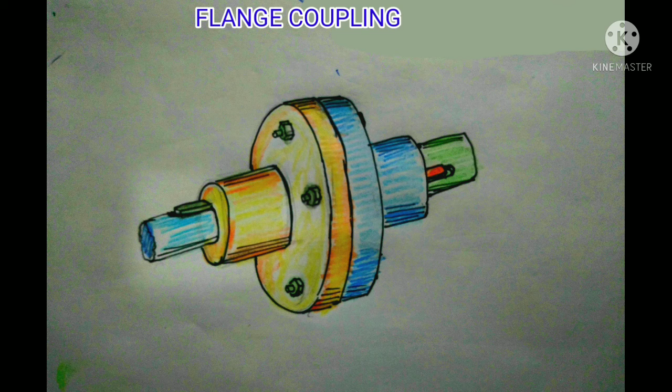Welcome everyone. Today in this video I am going to discuss the design of flange coupling. This is the drawing of a flange coupling. First I will discuss about the flange coupling, and then I will discuss how to design it.

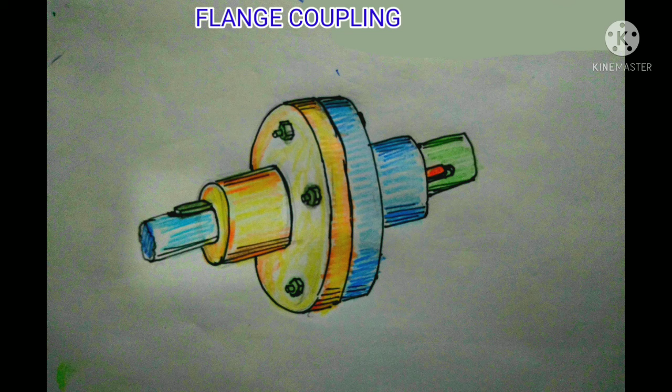Here we will take a look at different parts of the flange coupling. This one is the driving shaft, from where we transmit power to another shaft, called the driven shaft. Both shafts are coaxial, so we can transmit power from the driving shaft to the driven shaft.

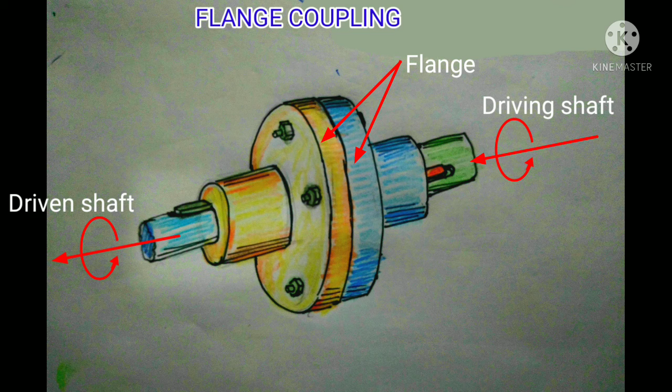These are the two flanges, driver flange and driven flange, and this portion of the flange is called the hub. There are keys. A key is placed between the hub and shaft for tightening and to prevent slip between shaft and flange. There are also nuts and bolts to hold these two flanges together.

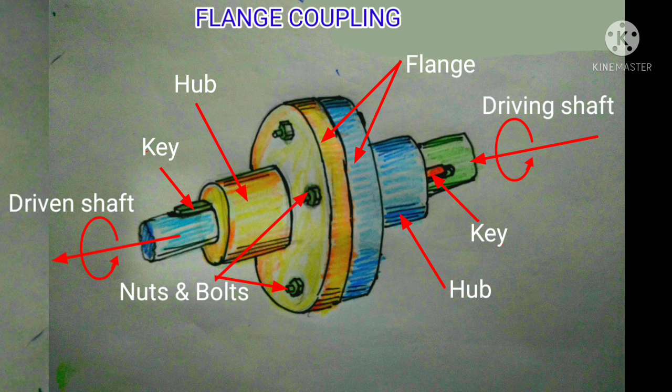Now we will take a look at the flange coupling in the disassembled condition. Here we see two flanges: one flange is for the spigot side and another one is for the socket side.

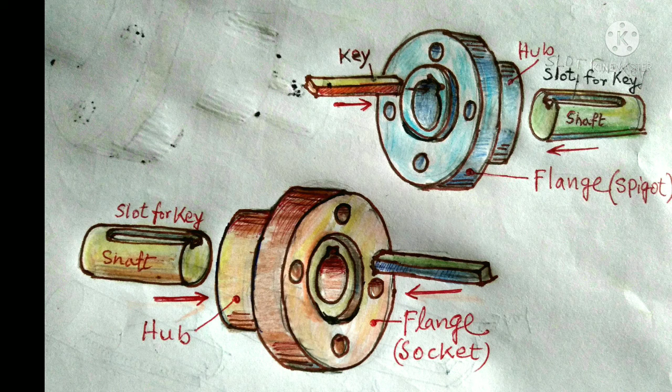It will be better if we compare it with the cross-sectional view. So this is the full sectional front view of this flange coupling, this is the flange for the spigot side, and this one is the flange for the socket side.

Look at this portion of the hub. There is a socket, so that the other part of the hub from the spigot flange can be inserted into this socket portion of the hub.

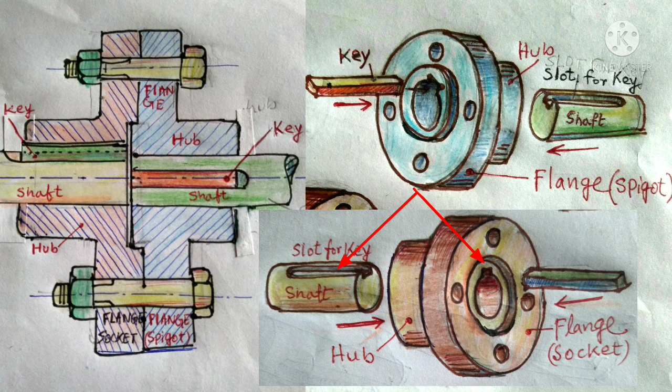Look at the shaft and hub. There is a cut slot between the shaft and hub to insert the key. Half portion of the key is inserted in the shaft and another half part is inserted into the hub, so that the key is used here to prevent slip between the hub and shaft when the shaft is rotated.

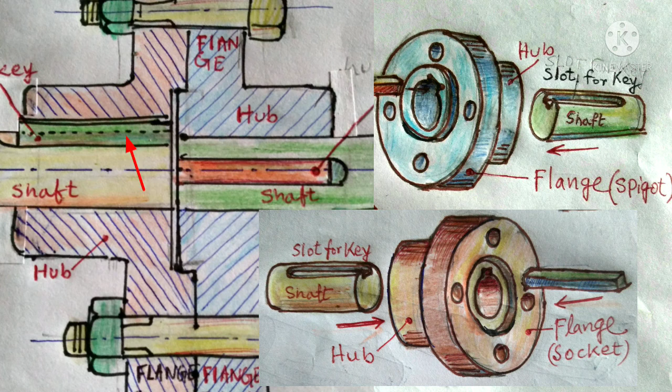There is another important thing, which is the material. Here the shaft is made of steel and the flange is made of cast iron, and keys and nut bolts are made of mild steel.

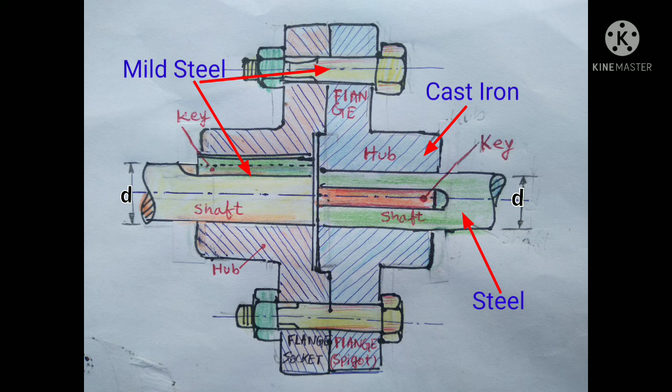Now we will go to the design part. We will discuss the design through a problem.

The problem is: design a cast iron protective type flange coupling to transmit 15 kilowatt at 900 rpm from an electric motor to a compressor. The service factor may be assumed as 1.35, and the following permissible stresses may be used.

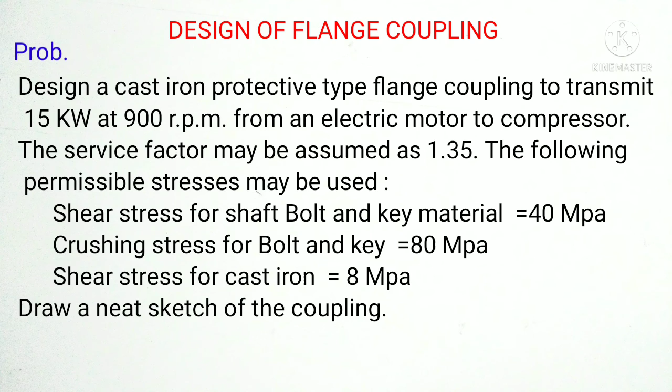Shear stress for shaft, bolt and key material is 40 MPa. Crushing stress for bolt and key is 80 MPa, and shear stress for cast iron is 8 MPa. Then draw a neat sketch of the coupling.

Now we will take a look at which data is given. First is P, that means power, 15 kilowatt, that is 15 into 1000 watt. Next is N, that means rpm, the rotation of shaft per minute, revolution per minute, which is 900. Next, service factor is 1.35, and next one is the shear stress.

Tau s is for shaft, tau b is for bolt shear stress, and tau k is for key, which are all equal, and the value of tau is 40 MPa, that means 40 Newton per millimeter square. And the crushing stress, which is sigma c: sigma cb for bolt and sigma ck for key, which are equal in value, and the value is 80 MPa, that means 80 Newton per millimeter square.

Next one is shear stress for cast iron. We know that the flange material is cast iron, so tau c is 8 MPa, that means 8 Newton per millimeter square.

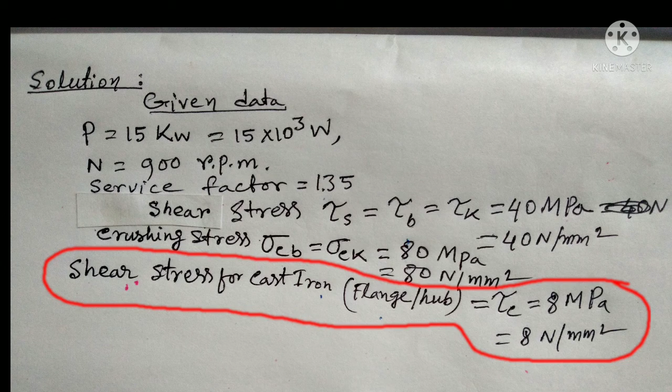Before starting any design, we have to know the relation between power and torque. So let's start. First one is the angular velocity, denoted by omega, and we know that omega is theta by t, where theta is in radians and t is in seconds.

Here n is the number of revolutions per second. As we know, for one revolution the angle rotated will be 360 degrees, that means 2 pi radians. And for n revolutions, it will be 2 pi n radians.

As n is revolution per minute, for 1 minute or 60 seconds, the angle rotated is equal to 2 pi n radians. For 1 second, the angle rotated will be 2 pi n by 60, the unit being radians per second. As we know omega is in radians per second, omega will be 2 pi n by 60.

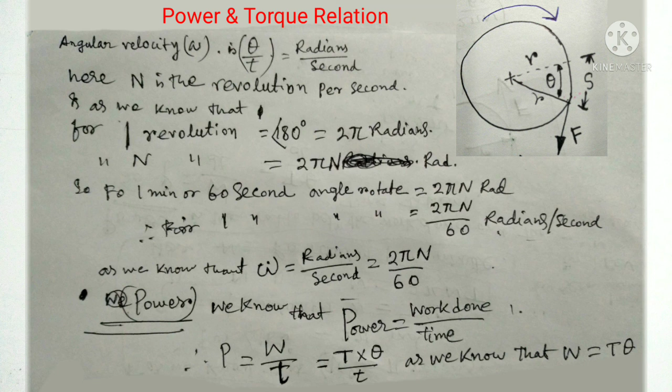Now look at this picture. Suppose this is the cross section of a shaft whose radius is r, and suppose it is rotated in the clockwise direction. Here F is the circumferential force and S is the distance moved by the force F, where theta is the angle in radians generated to move the S distance.

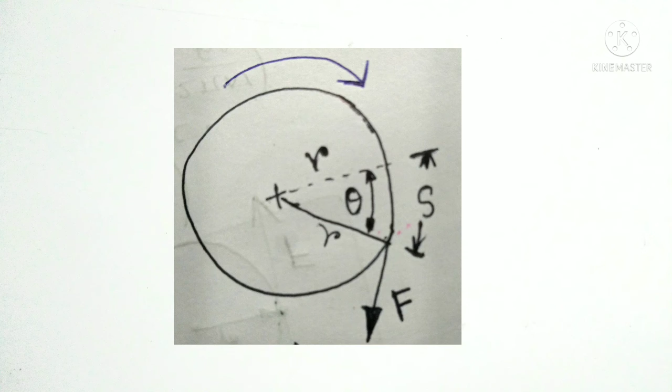As we know that work done is equal to force multiplied with the distance moved by the force. So W equals force F into S, where W is work done, F is force, and S is the distance moved by the force.

So for an angular motion, we can write that W is equal to F into r theta, where r is the radius in meter, and theta is the angle in radians.

Now we will calculate the torque, denoted by capital T. Torque is the turning or twisting force about an axis. Looking at the figure, we get that T is equal to F into R, that means force into radius.

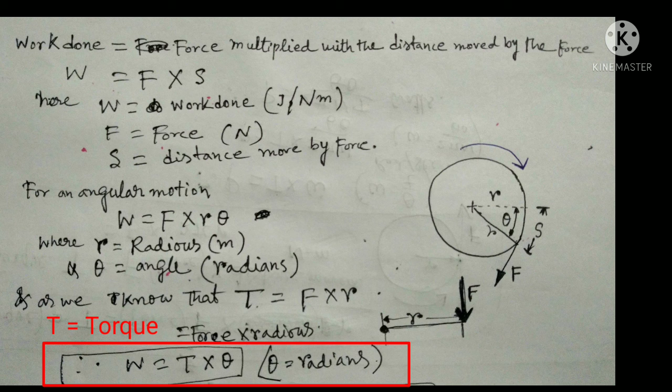So here we can write that work done W is equal to T into theta, where T is the torque and theta is the angle in radians.

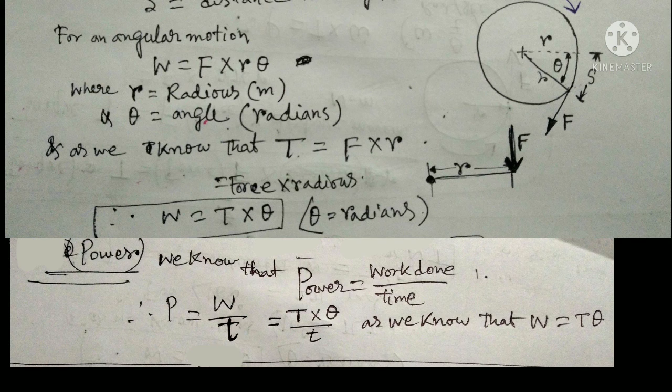As we know that power is equal to work done by time, we can write P is equal to W by small t. From the previous equation, W is equal to torque into theta. So P is equal to T into theta by small t. And since theta by t is equal to omega, we can write P is equal to T into omega.

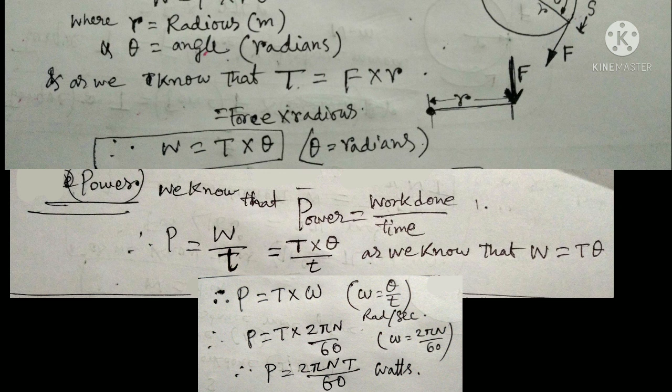Previously we calculated omega as 2 pi n by 60. So P is equal to 2 pi n T by 60 in watt. From this equation we can calculate the torque T, which is equal to P into 60 by 2 pi into n, in Newton meter.

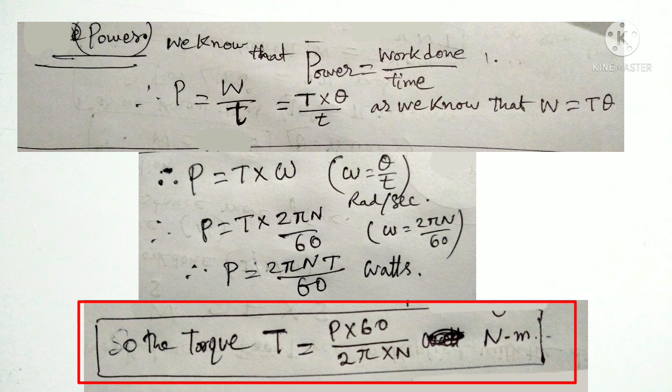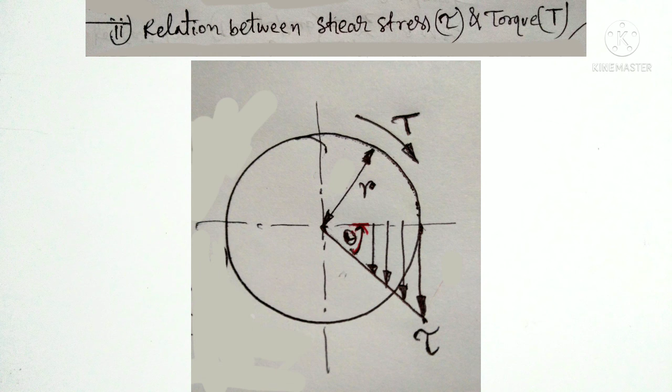Now we have to calculate another formula between the shear stress tau and the torque T. In this drawing we see that when torque T is applied, shear stress tau is generated, distributed from 0 at the center of the shaft to the maximum at the outer edge, where r is the radius of the shaft.

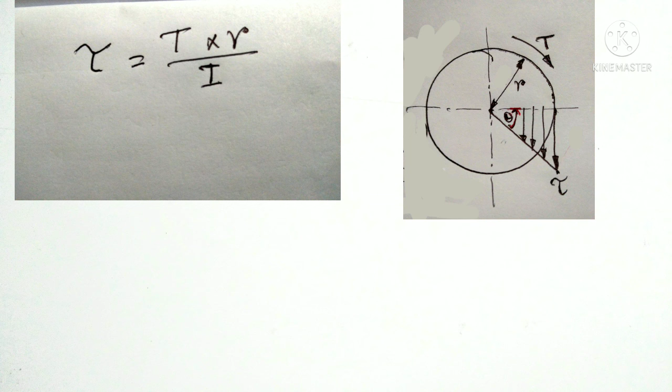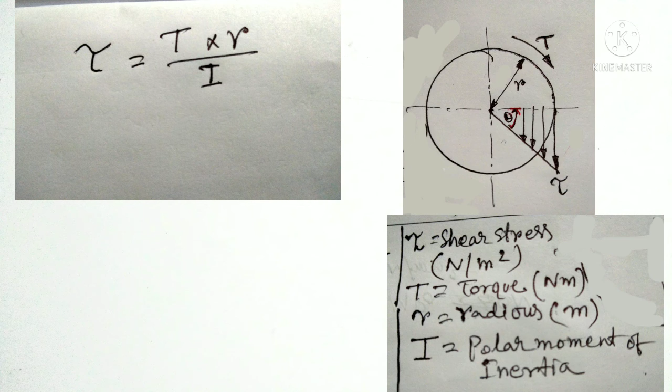As we know the formula, tau is equal to T into R by I, where tau is the shear stress in Newton per meter square, T is the torque in Newton meter, R is the radius in meter, and I is the polar moment of inertia.

We also know that the moment of inertia for a circular cross section is pi into d to the power 4 by 32, so T is equal to tau into I by r.

Now I will put the value of I, and for r I will write d by 2, where D is the shaft diameter. Finally we get the formula that torque T is equal to tau into pi into d cube by 16.

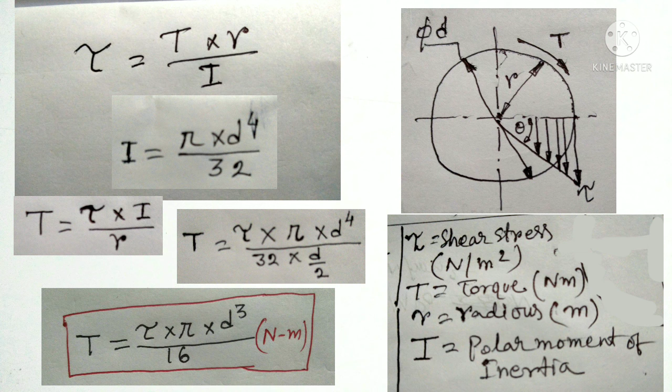Let's start. First of all, we know the formula that torque T is equal to P into 60 by 2 pi n, and using this formula we get the value of torque as 159.13 Newton meter.

Since the service factor is 1.35, we multiply the torque with 1.35 to get the maximum torque, which will be 215 Newton meter, converted to 215 into 10 to the power 3 Newton millimeter.

As we know the formula that the torque transmitted by the shaft T is equal to tau into pi into d cube by 16, we use this maximum torque, which is 215 into 10 to the power 3 Newton millimeter, and tau is the shear stress given as 40 Newton per millimeter square.

Using this formula, we get the value of D, which is 30.1 millimeter. So we take the nearest full digit, that means 35 millimeter, for our design, and we use the shaft diameter of 35 millimeter for each calculation.

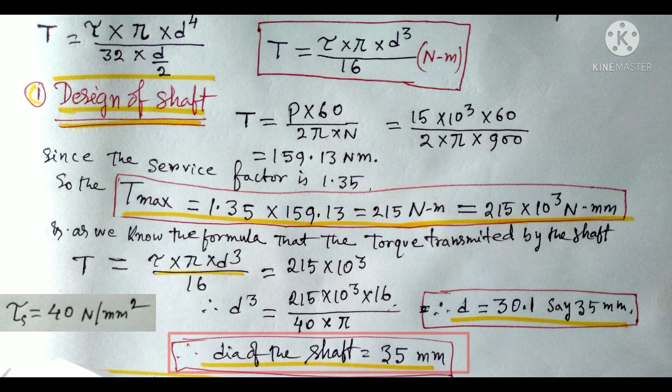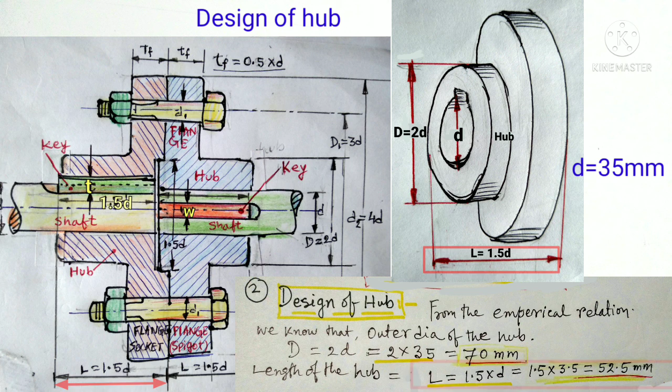Now we will do the design of the hub. From the empirical relation we know that the outer diameter of the hub, capital D, is equal to 2 into small d, where small d is the diameter of the shaft. So we get the outer diameter as 70 millimeter, and the length of the hub L is equal to 1.5 d, giving a length of the hub of 52.5 millimeter.

Now we have to check the shear stress for the hub portion. For this we treat the total length, that is 1.5 d, as the hub. We see here that the hub is a hollow shaft, and now we have to calculate the induced shear stress, which must be less than the allowable shear stress, that means 8 MPa for cast iron.

We know that if the hub rotates with the shaft, there must be generated a torque. We know the formula that shear stress tau is equal to torque into R by I, where I means moment of inertia. From there we can write that torque is equal to tau into I by R. We also know that I is equal to pi into d to the power 4 by 32, and for the hollow shaft it will be pi into capital D to the power 4 minus small d to the power 4, by 32.

Now we will put the value of I and R, where R will be capital D by 2, and tau c is the shear stress for cast iron, which we have to induce. Capital T is the maximum torque, which we calculated previously, that is 215 into 10 to the power 3 Newton millimeter. From this equation we get the value of induced shear stress, which is 3.4 Newton per millimeter square, that means 3.4 MPa.

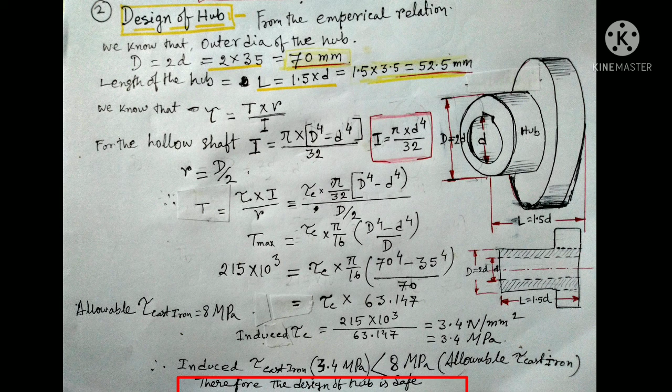We can see here that induced shear stress for cast iron is 3.4 MPa, which is less than 8 MPa, and we know that 8 MPa is the allowable shear stress for cast iron. Therefore, the design of the hub is safe.

Now we'll do the design of the key. From the empirical relation, we know that width of the key W is equal to D by 4, thickness of the key small t is equal to D by 6, and length of the key is equal to length of the hub, that means 1.5 D.

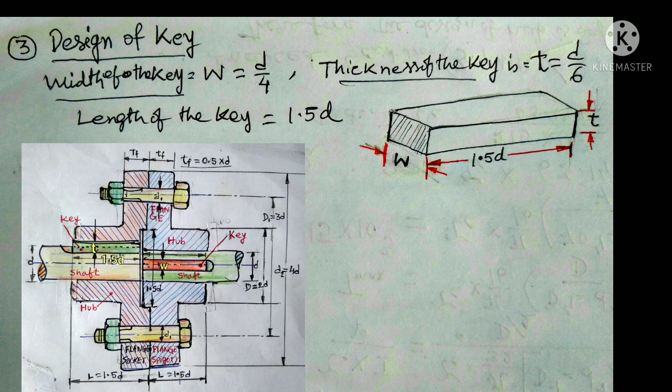We see here that if the shaft is rotated, then a shear stress is induced in the key, and the shear area will be W into L, where W is the width and L is the length of the key.

Similarly, we know that a torque will be generated, and we know the formula: torque T is equal to force into radius. We also know that stress is equal to F by A, where F is the force and A is the area. So we can write that tau is equal to F by WL, where WL is the shear stress area. From this equation we get F is equal to tau S into WL.

Now we can write that torque is equal to stress into area into R, which is tau into W into 1.5 D into D by 2, because we see here that R is equal to D by 2. Previously we calculated the torque, which is P into 60 by 2 pi N.

From this equation we have to calculate the shear stress, which is tau I, that means induced shear stress. Now we have to check that if this induced shear stress is less than the allowable shear stress, and if it is smaller than the other, then our design is correct or safe.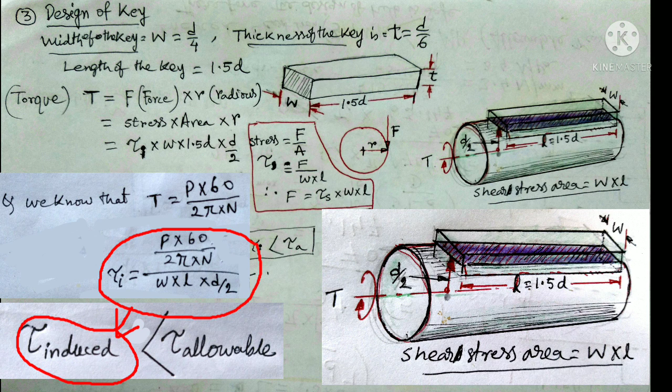Now we will calculate the crushing failure of the key. We will see in this drawing that if the shaft is rotated, there will be generated a crushing stress in this area.

We look here that half the portion of the thickness of the key is inserted into the shaft, that means T by 2. So the crushing area will be T by 2 into L, where T is the thickness of the key and L is the length of the key.

As we know that torque is equal to force into radius, and we also know that force is equal to stress into area, we can write torque is equal to sigma C into T by 2 into L into D by 2. Here we know that R is equal to D by 2.

We also know that torque is equal to P into 60 by 2 pi N. To use this equation, we have to calculate the crushing stress, that means sigma C induced, and we have to compare this crushing stress with the allowable crushing stress. If it is less than the allowable crushing stress, then the design of the key is safe.

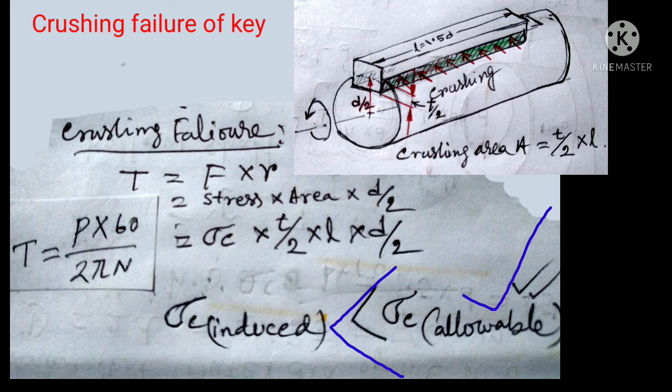Now for our problem, since the crushing stress is twice the shear stress, we may use a square key. According to the empirical or standard relation, the width and thickness of the key will be D by 3, that means 12 millimeter. Let us now check the induced shear stress in the key.

As we know that maximum torque is equal to tau CKI into W into 1.5 D into D by 2, where tau CKI is the induced shear stress for the key, and we also know that maximum torque is 215 into 10 to the power 3. So we put all the values to calculate tau CKI, and after calculating we get the value of tau CKI as 19.5 Newton per millimeter square, which is less than the allowable shear stress, 40 Newton per millimeter square. So the design of the key is safe.

Now we have to check the induced crushing stress, and we also proved that formula previously, that torque is equal to sigma CKI into T by 2 into L into D by 2, where sigma CKI is the induced crushing stress for the key.

After putting all the values, we calculate the value of sigma CKI as 41.7 Newton per millimeter square, which is less than the allowable crushing stress of 80 Newton per millimeter square. So we see here that our design of the key is safe.

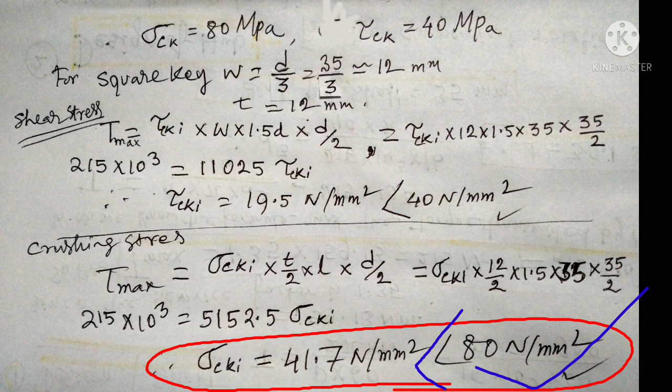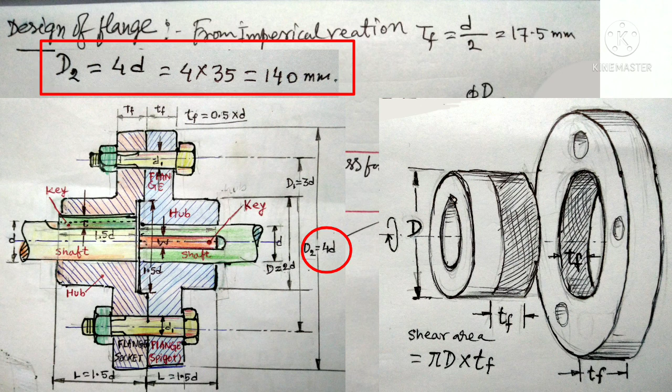Now we will do the design of the flange. From the empirical relation we get TF, the thickness of flange, equals D by 2, that is 17.5 millimeter, and the outer dia of the flange, capital D2, equals 4D, that is 140 millimeter.

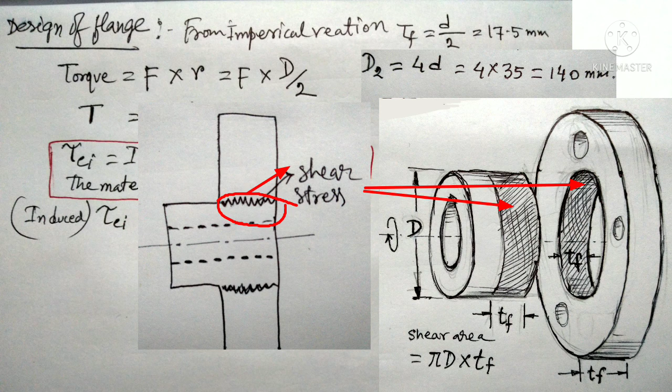Now let's look at the drawing. If torque is generated for rotation of the shaft, a shear stress is also generated between the hub and flange at this position, and the shear stress area will be pi capital D into TF, where capital D is the outer dia of the hub, equal to 2D, and TF is the thickness of the flange.

We know torque equals force into radius, where F is stress into area and R is D by 2, and area is pi D into TF. So we can write torque T equals tau Ci into pi D into TF into D by 2, where tau Ci is the induced shear stress for the material cast iron.

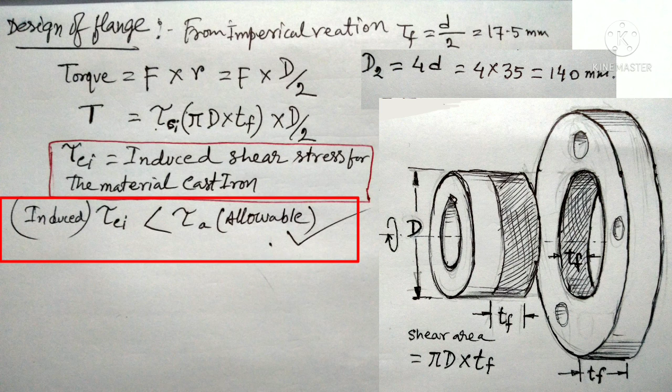We also know the value of torque. From this equation we have to calculate the induced shear stress and check whether it is less or greater than the allowable shear stress. If it is smaller than the allowable shear stress, our design will be okay.

Now for our problem we put all values into the formula above to calculate the induced shear stress, tau Ci. After calculating, we get tau Ci equals 1.6 Newton per millimeter square, which is less than the allowable shear stress of 8 Newton per millimeter square. So we see here that our design for the flange is safe.

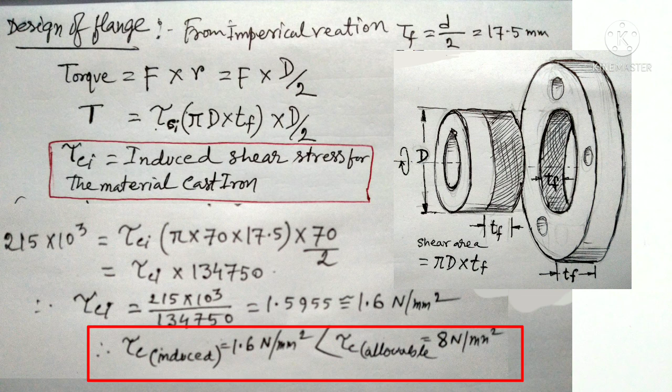Now we will design the bolts. Let's see this drawing, where small d1 is the nominal dia of the bolt and n is the number of bolts. We see here that the pitch circle dia of the bolts is capital D1, and from the empirical relation we take capital D1 equal to 3D, where D is the diameter of the shaft.

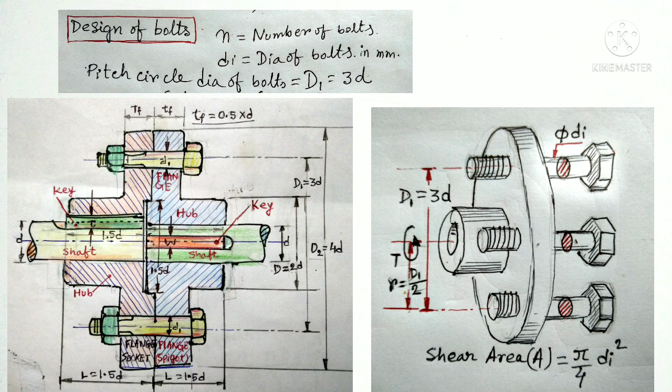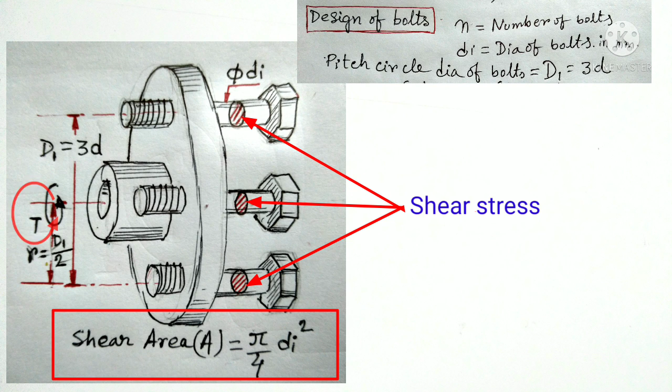Now we will look at this drawing. Here we see that the bolts are subjected to shear stress due to the torque transmitted, so the shear area will be pi by 4 di square, where di is the nominal dia of the bolt, and we also know that torque is the product of force and radius.

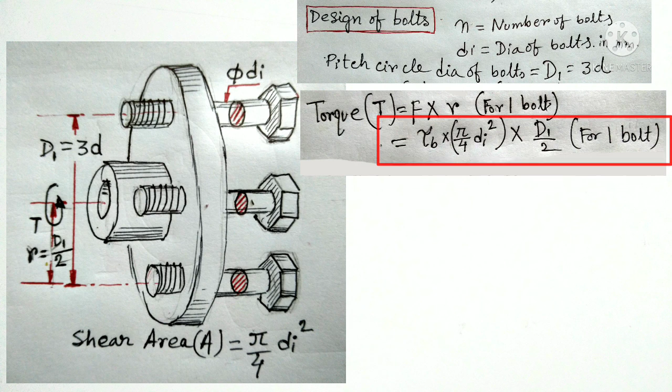So we can write that T equals F into R for 1 bolt, and we know force equals shear stress into area, and R is the radius, which will be capital D1 by 2. So we can write torque equals tau B into pi by 4 di square into capital D1 by 2 for 1 bolt.

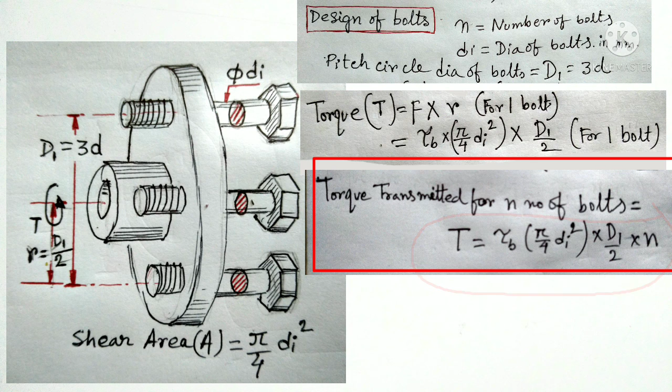For n number of bolts, total torque will be tau B into pi by 4 di square into capital D1 by 2 into n, where n is the number of bolts. Now from this equation we will calculate small di, the nominal dia of the bolt.

Now let's come back to our problem. Since we take the dia of shaft as 35 millimeter, we take the number of bolts n as 3. Now we will put all values into this equation and calculate small di, the nominal dia of the bolts, and after calculating we get small di equal to 6.6 millimeter.

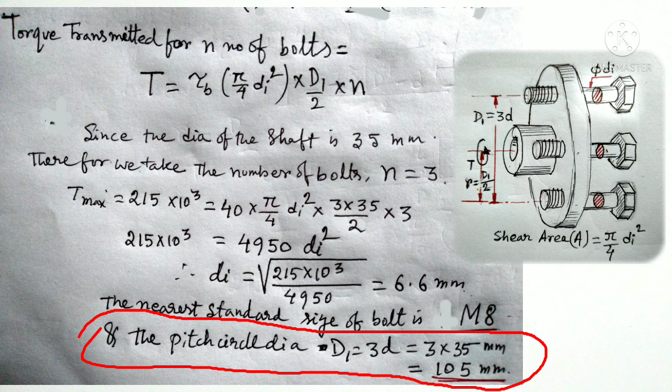Now assuming coarse thread, we take the nearest standard size of bolt as M8, meaning metric thread, with bolt dia 8 mm. Now we calculate the pitch circle dia, capital D1 equals 3 into shaft dia 35 millimeter, that is 105 millimeter.

Finally, we check the induced shear stress using the bolt dia 8 mm. We put all the values into this equation and calculate tau bi, the induced shear stress for the bolt material, and after calculating we get induced shear stress tau bi equal to 27.1 MPa, which is less than the allowable shear stress of 40 MPa. So we see here that the design of the bolt is safe.

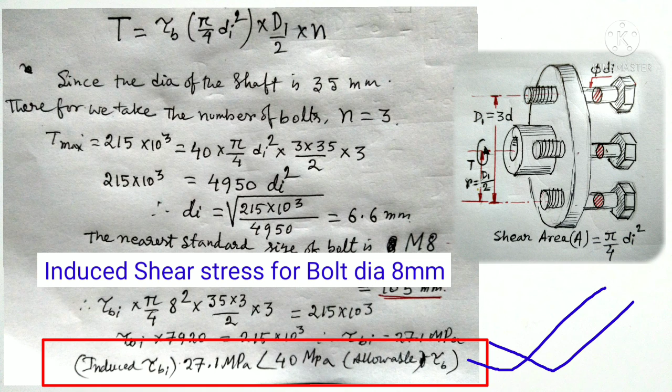So here is the final drawing of our flange coupling design, with the front view of the flange shown half sectional. We draw the section line A dash, and as we used 3 bolts, the angle between two bolts will be 120 degrees. I use a hidden line here to better understand, but for the sectional front view you don't need to give hidden lines.

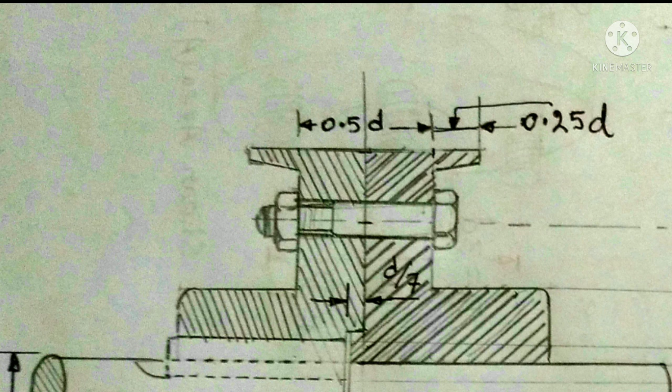Another important thing is that in our problem we were asked to design the protective type flange coupling. To draw this we use the empirical relation where width of the flange is 0.25d; you can take any suitable length, and the thickness of the socket part of the flange you may take as d by 7. Let's finish the video here, and thank you all for watching.